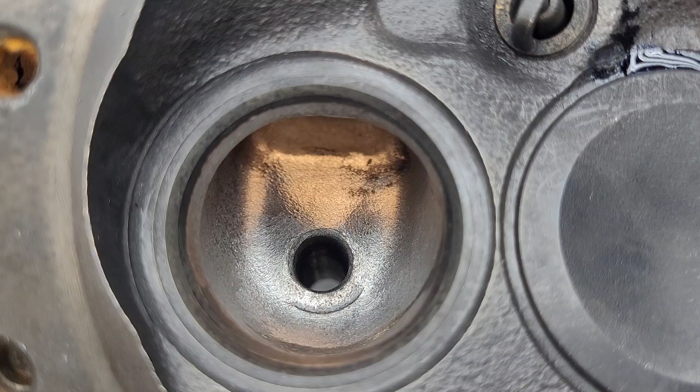This is nowhere near thin. Is it similar to the chunk that DV did? It's similar. It is not the same. I actually am going to do a little more work to that chunk. As good as the exhaust is, I think we can make it even a little better. And it doesn't matter if I blow a hole in that, because that's what that chunk is for. As of right now, we got tons of metal, and this is looking pretty good.

So what is it? What did the bowl blend do? Now, some of the comments on the last video were very good. I like the guy that has the machine shop that was begging customers to do bowl blends. I totally understand that. For the money invested, the time invested, it's tough to beat. With my OCD, I can't do it. I have to do full porting. But that's just the way my brain is. I can't help it.

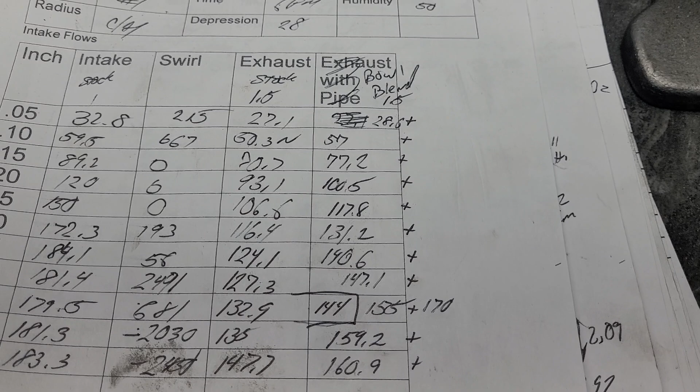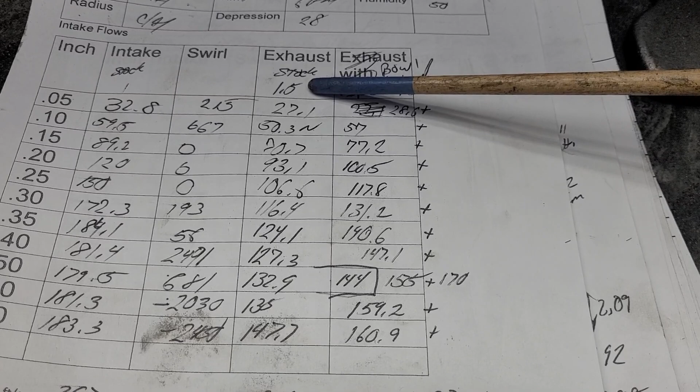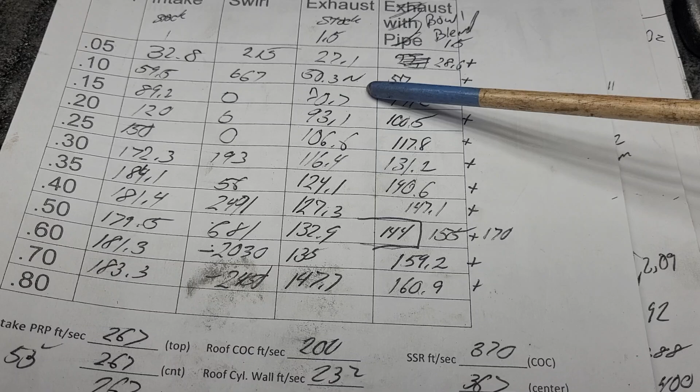Okay, we're going to be comparing this column to this column. This is Tim's head, stock 1.5. This is also a stock 1.5, but I added the bowl blend. Let's see how we did as far as pluses and minuses. It looks good to me. In fact, it's a pretty impressive gain for a bowl blend. I expected it to be good, but not quite that good. That's really good. There are no losses, and we even lost that noise that we had. So the port is obviously a lot happier.

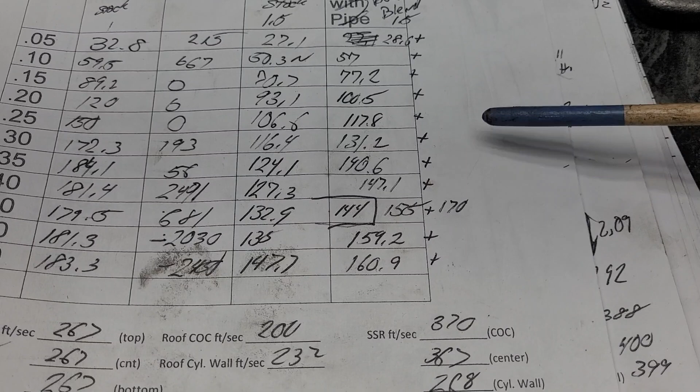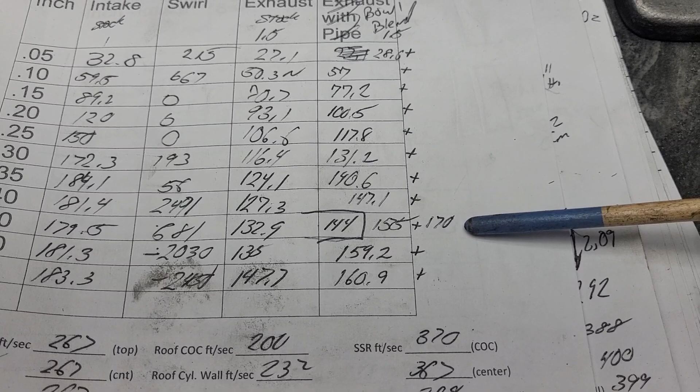And we get 170 with a pipe on it, which is better than a lot of heads flow. Okay, now remember, you got to use a 1 7/8 pipe because the port's so tall. In reality, probably an oval header might work better. That's a good question. I don't know about that, but interesting to think about.

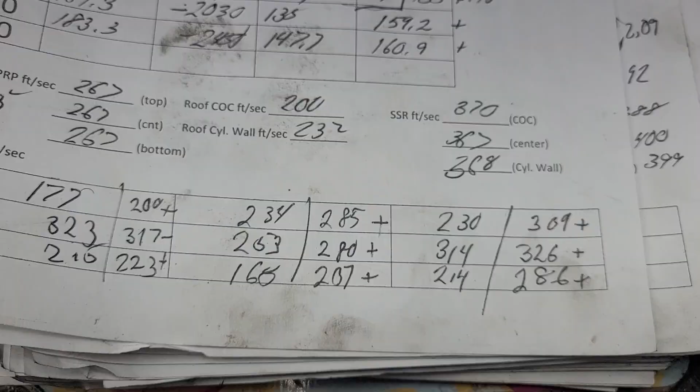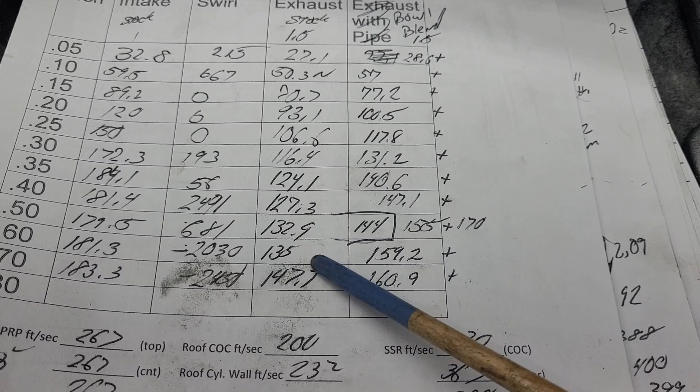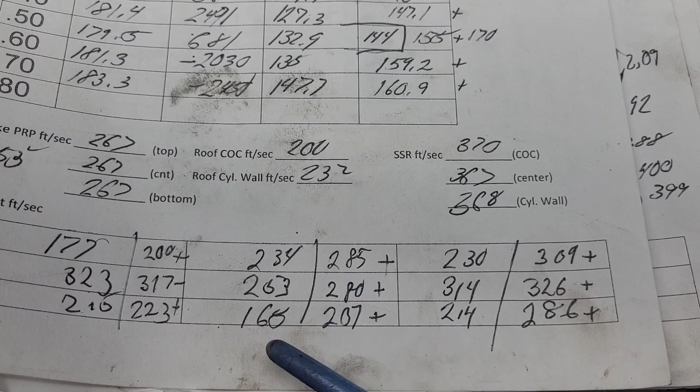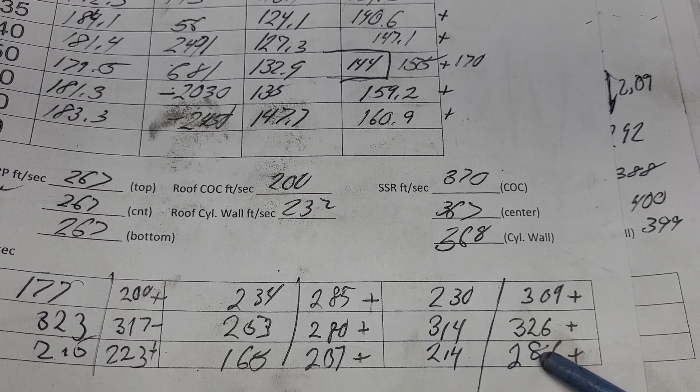Okay, messy airspeeds. All of the numbers on the left side are the stock ports. They go to this flow curve. All the numbers on the right side go to the bowl blended. Now, plus, minus, plus, plus, plus, plus, plus, plus, plus. Look at the huge difference we have. Big step up, small step back, decent step up, big step up, big step up, huge step up. Look at this, 230 to 309, massive step up. Step up, look at this, step up. So, what does that tell us?

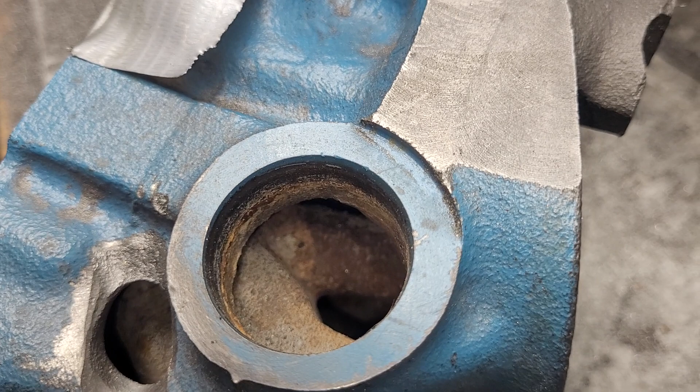Well, let's take a look at the port itself. The port is considerably wider across here, okay? It's a touch deeper, but you have to be careful how deep you go because you don't want to make a hole here, right? I do have DV's head chunk. Let's take a quick look at that. We can do some measuring and find out exactly how tall that is. As you can see, I was making holes in this just to figure out what we got.

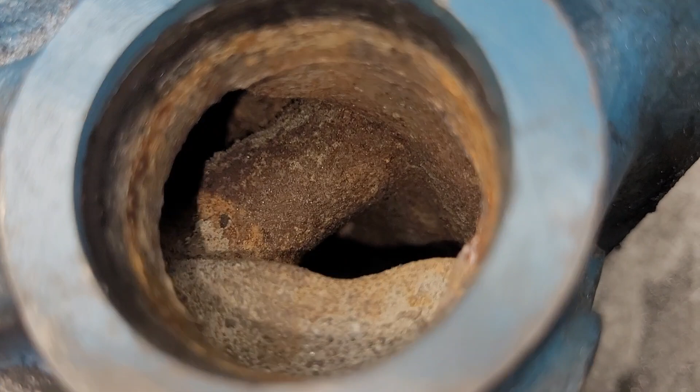Notice that big dip in the port that I can't stand. They should have never done that. And you can also see where the guide attaches to the port itself. We could probably figure out exactly how much metal we have in the roof of that bowl right there, and we could probably make this even better.

But this chunk of head is no joke to make a hole through. It's thick everywhere, really. I mean, I'm pretty impressed with these little open chambers, to be honest. I think these will easily beat the 302s that I put a ton of work into, but we'll find out for sure.

Sorry, lost my train of thought, guys.

I can certainly see where putting a bigger valve in these is not a problem, and would just make the ports work even better. So I'm sure there's numbers out there somewhere, guys putting oversized valves in here. I'm willing to bet you could even go 2.02/1.60 on these without any problem at all, and get some pretty impressive flow numbers out of these. Off the top of my head, I'm gonna guess somebody's gotten 260, 265 out of these with an oversized valve.

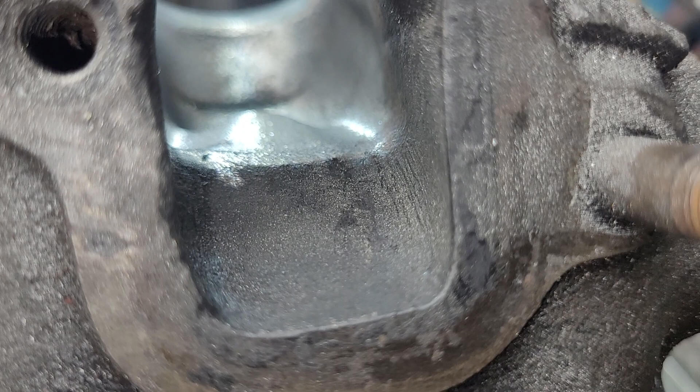Let's take a look at the flange side. Okay, a little bit better view where I actually did do the grinding up until that big bulge in the port. Now, you can take some of that bulge out, but that is definitely the thin spot in that port. I would not take it. You might be able to take it completely out and have a straight roof, which would be nice. I'll have to do some measuring on that. I can't say for sure whether you can or not.

This port actually has a decent sized chunk knocked out by that bolt, but obviously it is what it is. It's the way it came from the factory. Sometimes they do that because they hammer off chunks of the sand core and they take little pieces of the block out. These heads had a lot of chips in the chambers. Let me show you that. All right, not a lot, but you can see we've got some hammer marks in the chamber where they knocked the sand cores out. You'll see a lot of cylinder heads have that. It's not that big a deal.

Okay, you can see I still left the original 3-angle valve job. I did not put a radius or anything on that. And it's still working damn well. Remember, I haven't changed the chamber at all yet. So what we're going to do is we're going to go piece by piece and we're going to find out where the gains are. And remember, I've got eight chambers and 8 ports that I can port in different succession and do videos if that's what you guys would like me to do. It just adds to my workload, which is already insane.